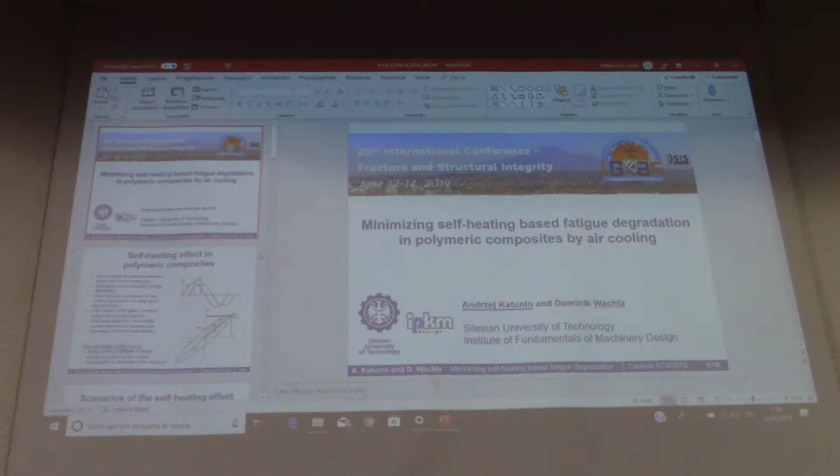My group has been working for years with the phenomenon of self-heating in polymeric materials and polymers. I would like to introduce firstly the idea of the self-heating phenomenon, which research we performed to date, and on what we are focusing now.

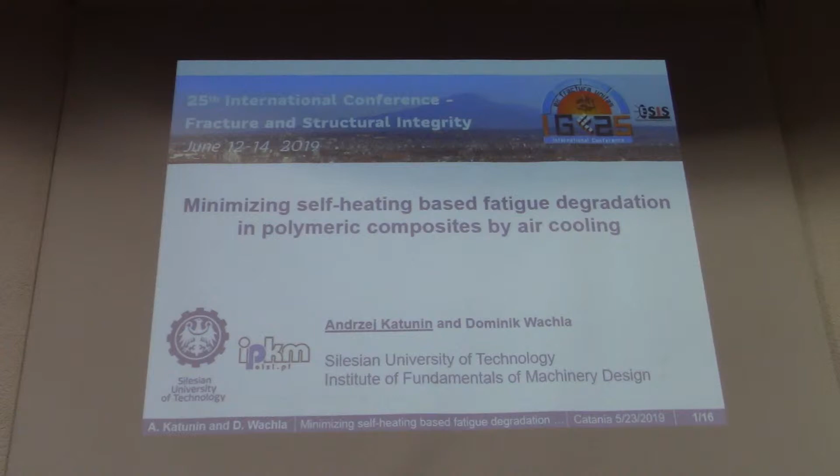So, if we talk about the self-heating effect, the genesis of this effect is in viscoelasticity of polymers. Since we have out-of-phase oscillations between stress and strain amplitudes, we have some difference in phase, and it results in energy dissipation. Most of this energy is dissipated in heat, and in the case of polymers, we already saw a presentation at the beginning about heating in steels. So here, these heating phenomena are much higher in intensity.

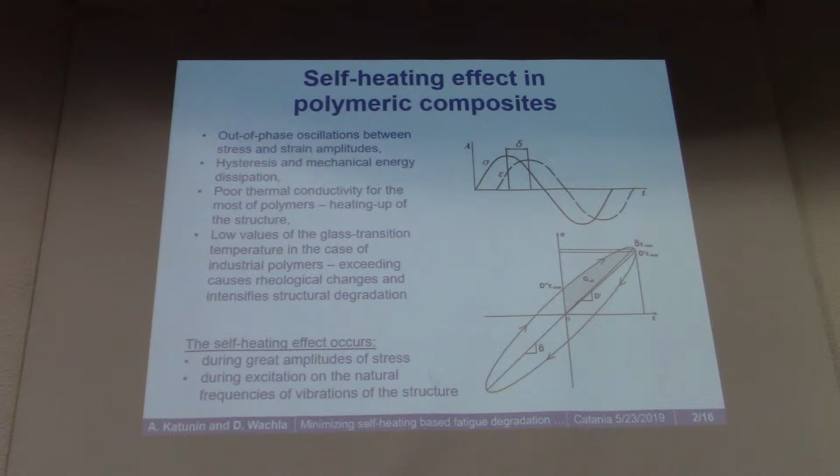Because polymers are generally low conductive, I mean thermal conductivity, this energy is stored in the structure and may cause some dangerous effects. In the case of cyclic loading, in the case of fatigue loading, we have some significant acceleration of degradation in the structure. So in this chart you can see some experimental results.

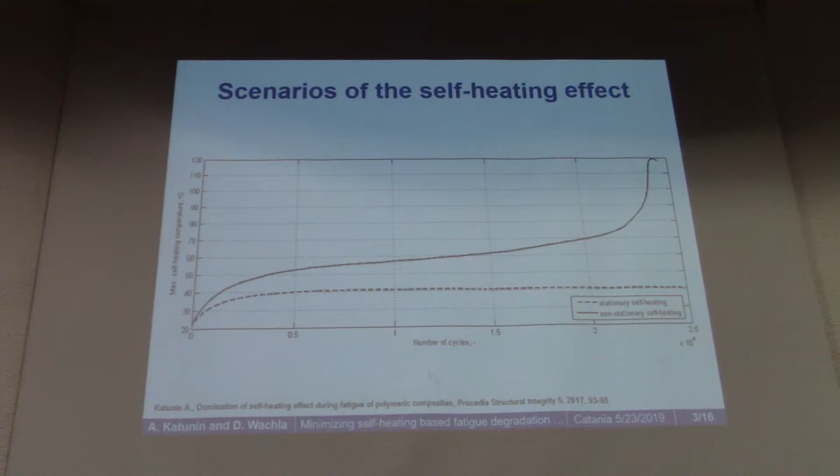So we have basically two scenarios experimentally achievable. One scenario is the stationary case. So after some increase, we have temperature stabilization, and the non-stationary case, which is much more dangerous. You can see that temperatures we can achieve here are really high. So in the end, we can even pass the Tg value for a given polymer, and this effect may significantly accelerate fatigue processes.

So we did some studies on criticality of this self-heating effect, just to have knowledge about at which temperature this process of degradation starts accelerating. This is important in particular from the point of view of performing fatigue tests. So we need to know up to which temperature it is possible to heat up our structure to

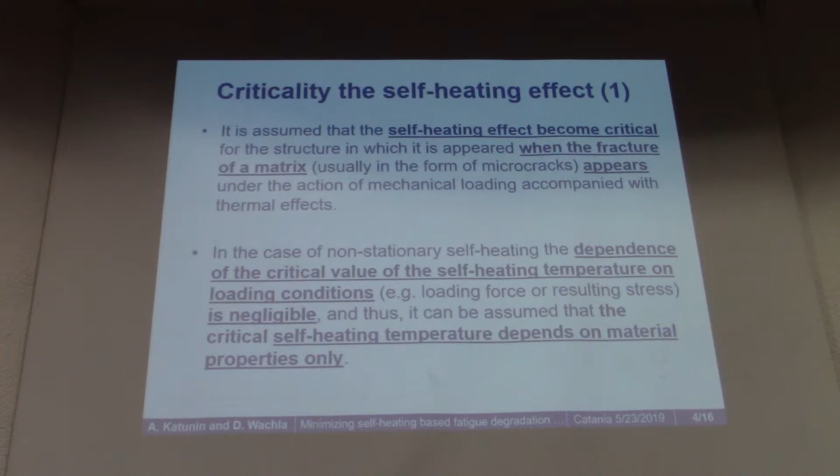not initiate accelerated degradation. So in the non-stationary case, we have a situation where loading parameters are almost not influencing the process. So this critical self-heating temperature can be considered here as a material parameter. And we did a lot of tests to determine this temperature. Here you can see the typical self-heating curve, and it is divided into three fundamental phases.

The first phase is the result of the second law of thermodynamics, so it is just the temperature increase because of that. Here, in the second phase, you can see a linear increase of temperature, which is a result of mechanical degradation. So in this phase, some microcracks start to appear, and at the end of this phase, these microcracks are consolidated into the macrocrack, and we have a very fast propagation of the defect because

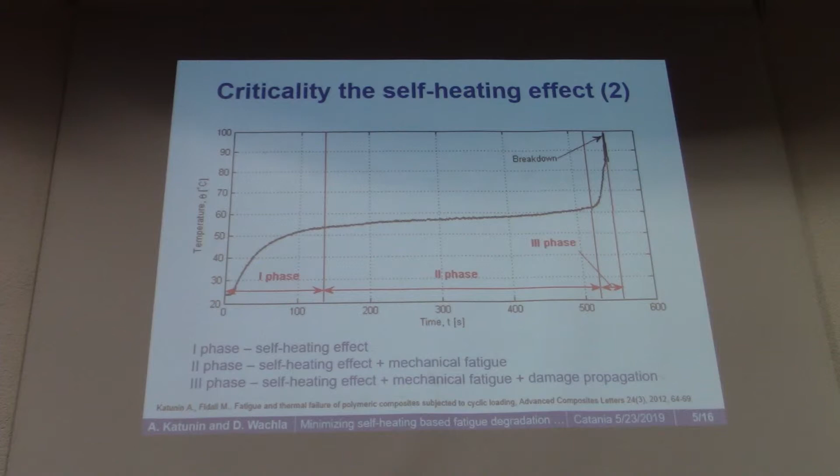apart from the self-heating effect, so the viscoelastic induced heating, we have additional frictional heating here due to the friction of surfaces in the crack. So of course it ends with the breakdown or failure of the structure. Here you can see some results of tests. So the blue line is the self-heating temperature curve, and the simplest method we applied is just the approximation of this curve.

When these curves start not to coincide, this point of non-coincidence is our critical self-heating temperature, and the green color is the result of acoustic emission testing. So you can see they mainly coincide, and for this material I thought it can be considered as a material property. For this material, this critical self-heating temperature is about 60 degrees.

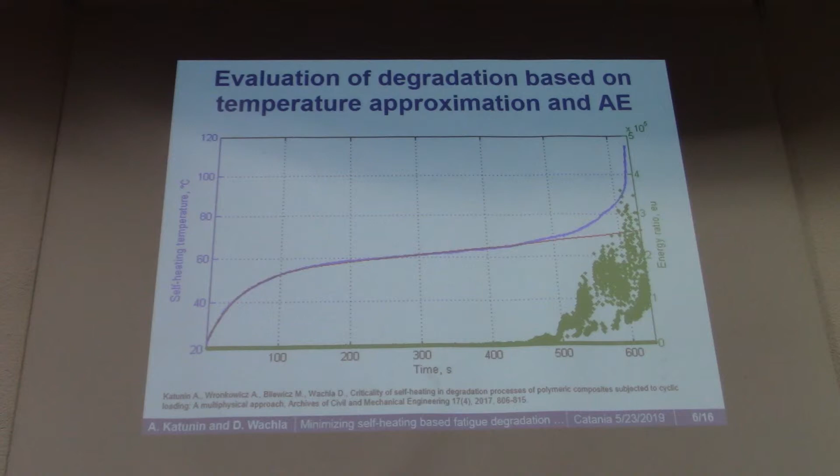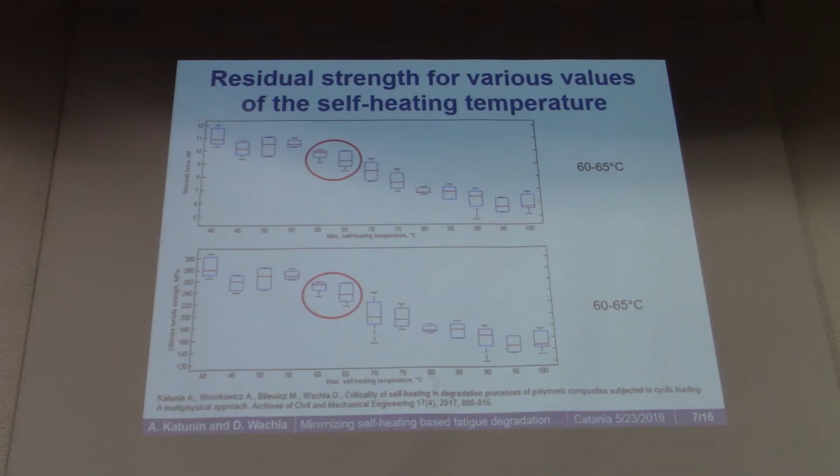We did also some static strength tests. So we used specimens which were loaded up to obtaining some specific self-heating temperature, and then for these specimens we did some quasi-static tensile tests. As you can see, this drop is also observable at similar temperatures.

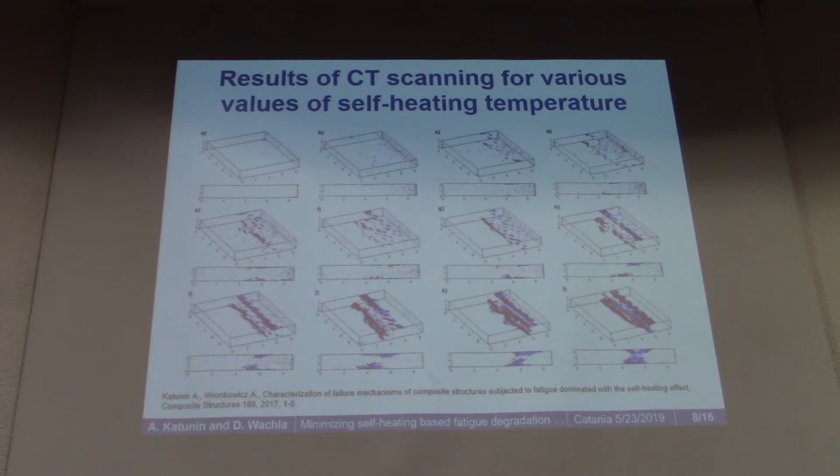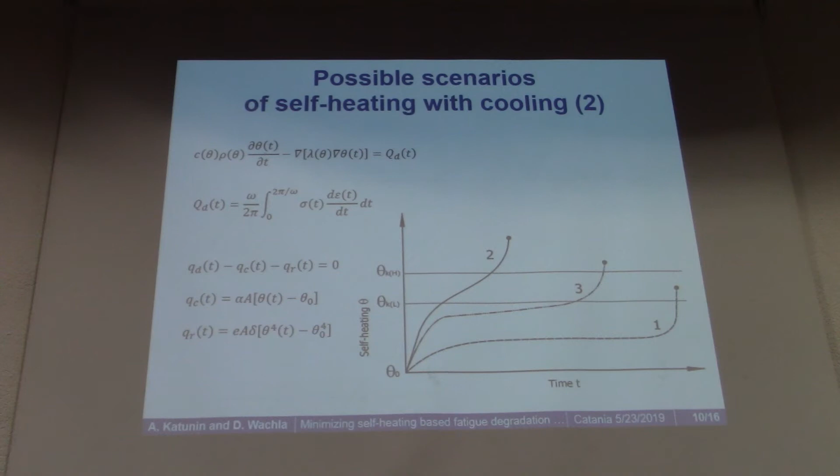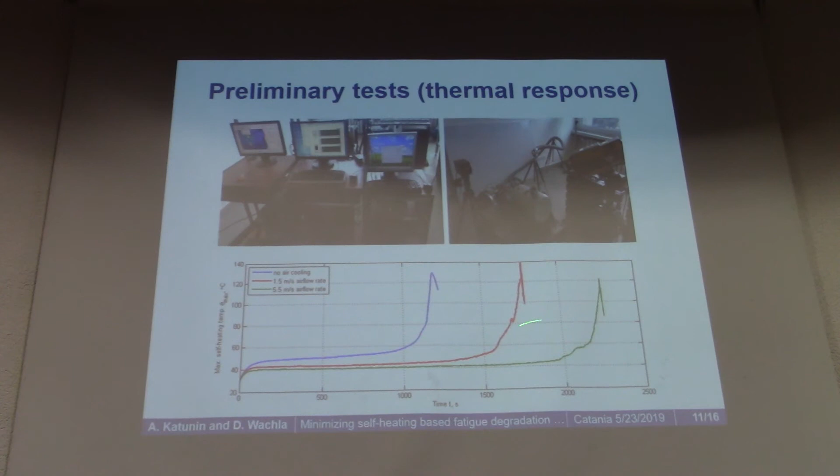On the chart below, you can see 3 cases we tested: the case with no cooling, and 2 cases with cooling at different speeds. These are the temperature evolution curves, just like I showed you before. As you can see, the difference is really huge between when we have air cooling of the surface and when it is not cooled, so the residual life with exactly the same loading parameters is much longer when we apply forced cooling.

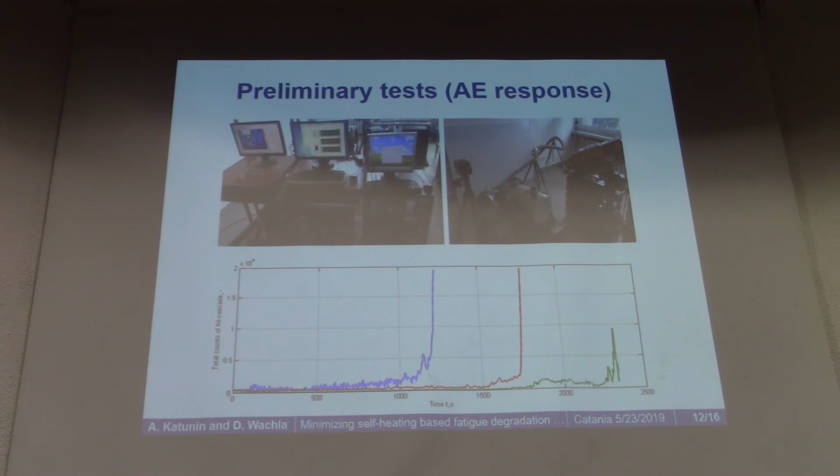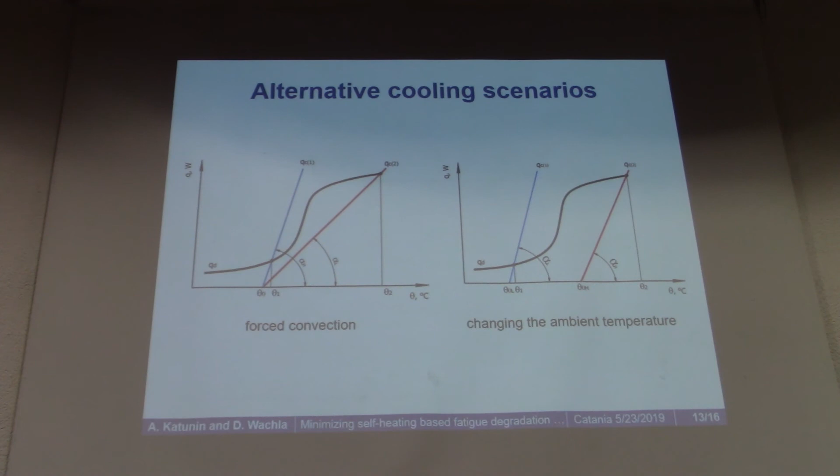And some alternative scenarios of cooling: what we can generally do here is forced convection, and here we can steer our alpha, our convection coefficient, by increasing, for example, the speed of our blowing air. And another case is when we change the ambient temperature, which also may change the surface temperature, and as a result may decrease the intensity of degradation.

Some conclusions, maybe why we are doing these tests. So the first direction which we are working on is a new method of non-destructive testing based on thermography. We use the self-heating effect as the excitation for thermography. There are some cases when we cannot apply typical heat sources for thermography. We submitted this method for patent protection 2 years ago, and it is still pending.

And another direction is very high cycle fatigue tests of these materials. Generally we are working with accelerated very high cycle fatigue tests in cooperation with our partners from Freiburg, Germany. There is a problem because we're loading with ultrasonic frequencies, and during this process the heat-up is really significant. This work in particular is a step toward solving the problem by cooling down the specimen during this process.